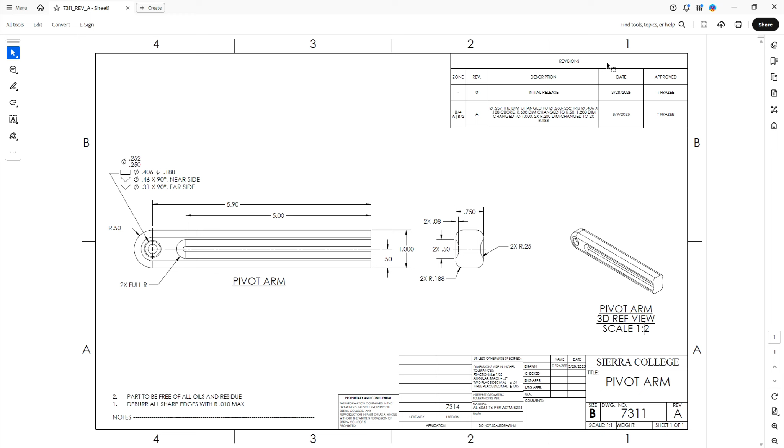The first thing you want to do in Fusion is save it off as the name. As per the assignment, you're going to put it in the format of the part number 7311, underscore, the word abbreviation REV in caps and A, because that's the version we're doing, underscore, and your first initial and last name. In my case, it would be T. Frazee. Make sure you're saving it somewhere you know where it's going.

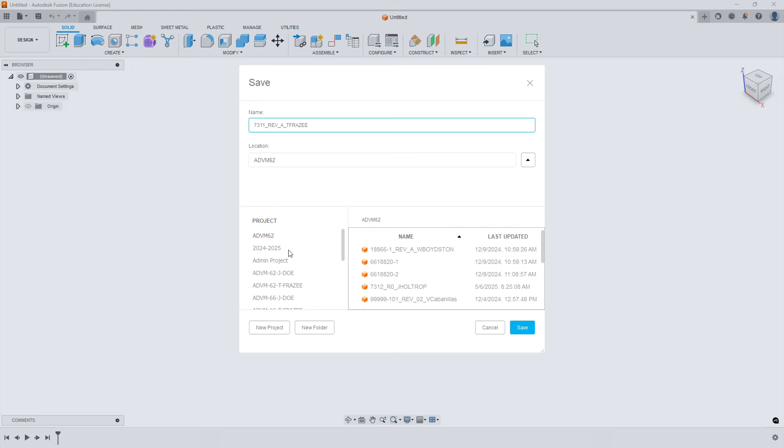We're going to start off by drawing the overall shape. We have an outside perimeter, basically a rectangle with a full radius on one end. Our origin for all our dimensions is this top right corner, so I'm going to model it just like that in Fusion, starting with a sketch from that view.

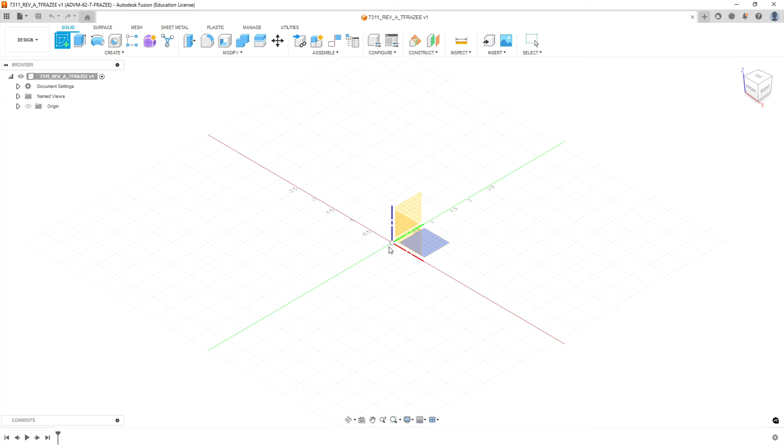We're going to go to Design and make a new sketch on the front plane. We're going to use the Line tool, starting to the left of Origin, going to Origin, then dragging down to make our rectangle.

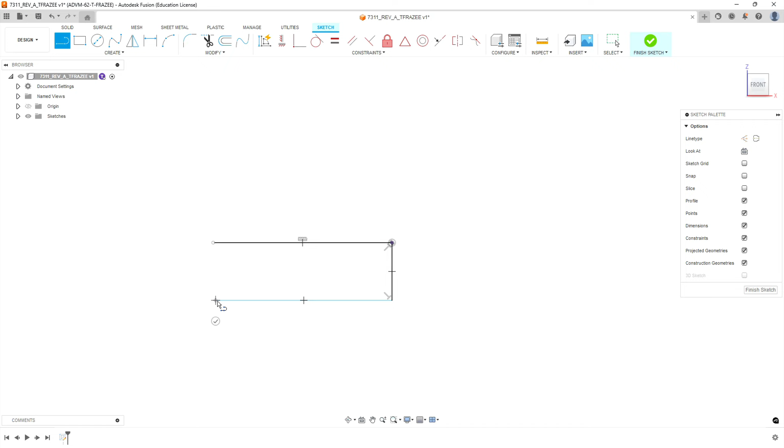We click, and then if we want to make an arc, we click and hold the button down and it'll turn into an arc, and we'll close that up. Now it assumed tangency for my lower one, but the top one it did not, depending on how careful you are in selecting it. We want both of these tangents, so if yours do not result in two tangent ends to this arc, make sure they have these symbols for tangency. Now we can put our dimensions on.

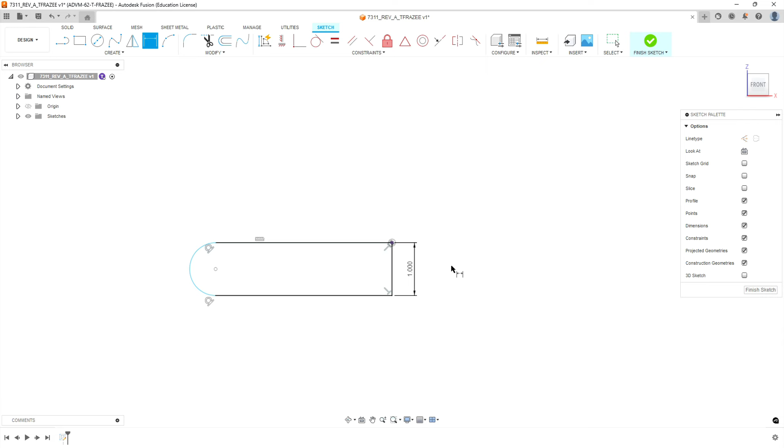If we go back to our drawing, it's 1 inch tall, so we're going to dimension that to 1 inch, and we're going to dimension the length from the end to where our arc ends, the arc center, which according to our drawing is 5.9. We should have a fully constrained sketch. If you expand your sketches, it should have the little padlock there, because the tangency points force this radius to be half whatever this dimension is.

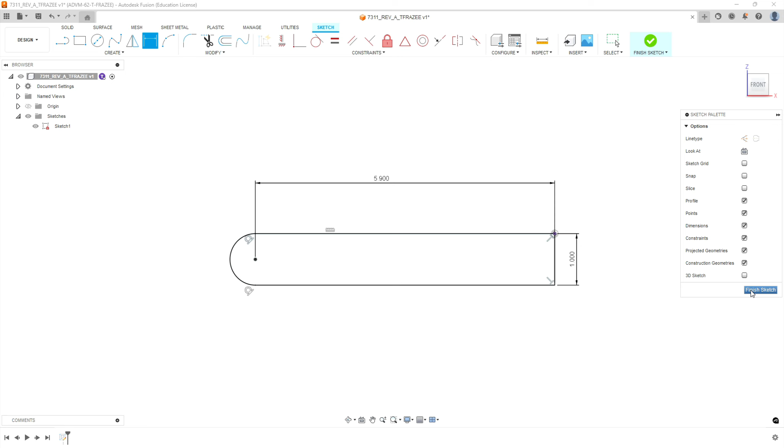Now we're going to select Finish Sketch and do an extrusion. Let's look at our extrusion depth, it is 3/4 of an inch, or 750 thousandths, so we're going to put in 0.75, and we have our basic shape.

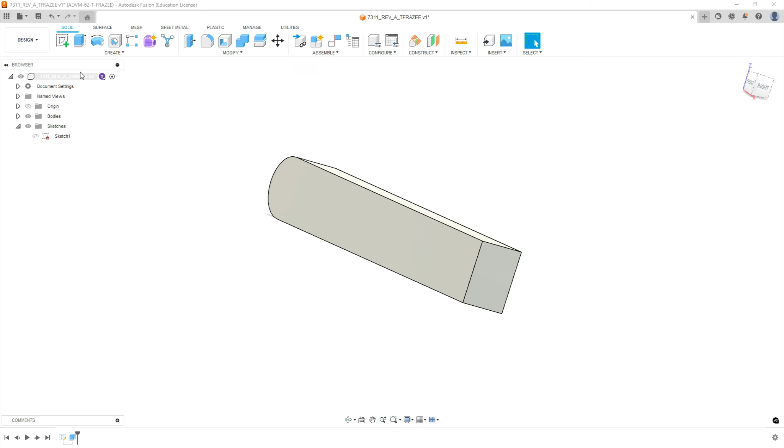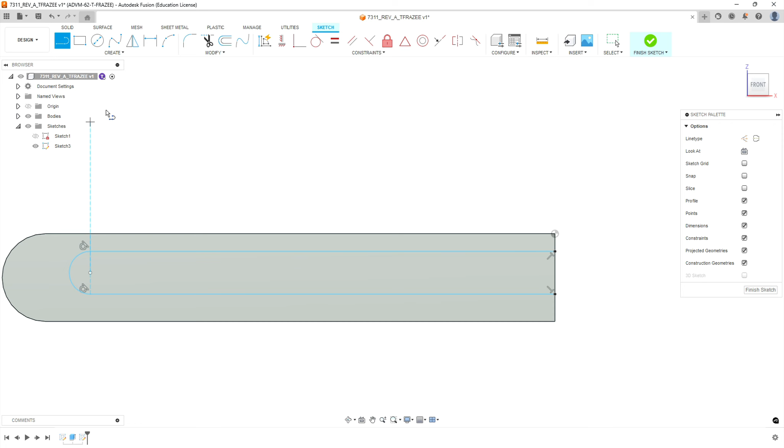We're going to make the pocket that's in the face of this. We go to sketch, sketching on the face of our block, and repeat something similar to what we just did to create the shape. We're going to start with a line on the right hand side edge, draw a straight line as horizontal as we can, then hover over the end of that line and hold the button down to make an arc, and continue with the line until we reach the other end of the part. So we now have the shape of this pocket here.

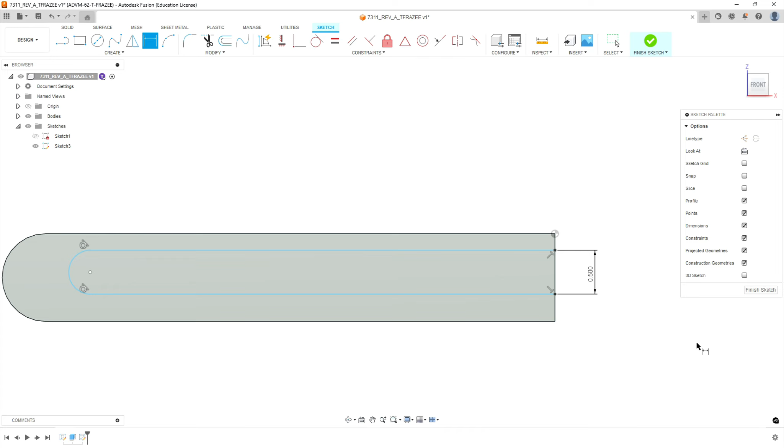It's 5 inches to center, and it's a half inch wide. We're going to put our half inch dimension in first, then come from one end to the center, that's 5, and we want to center this within our workpiece here.

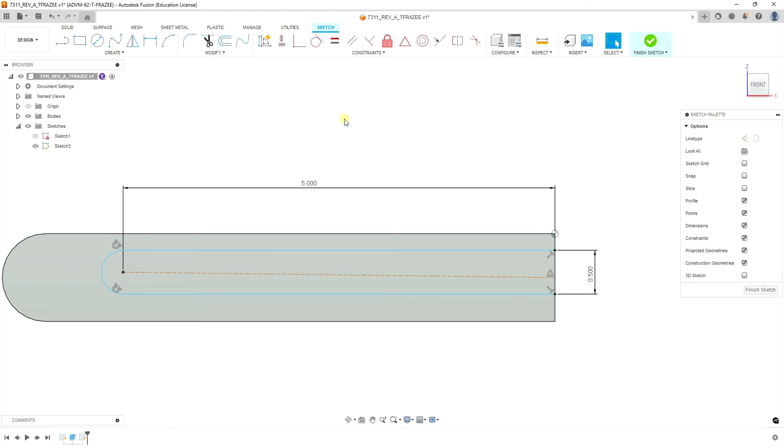There's a couple of methods we can use for that. What I'm going to do is create a line from center to the midpoint of the edge on the right. Then if we take this line we just created, we highlight it, right click, turn it into construction, and select the horizontal vertical command to force it to be horizontal, which should snap our shape into being centered on our material and horizontal. If we change the size overall of our part, it'll remain centered with that parametric relationship. We're going to hit finish sketch.

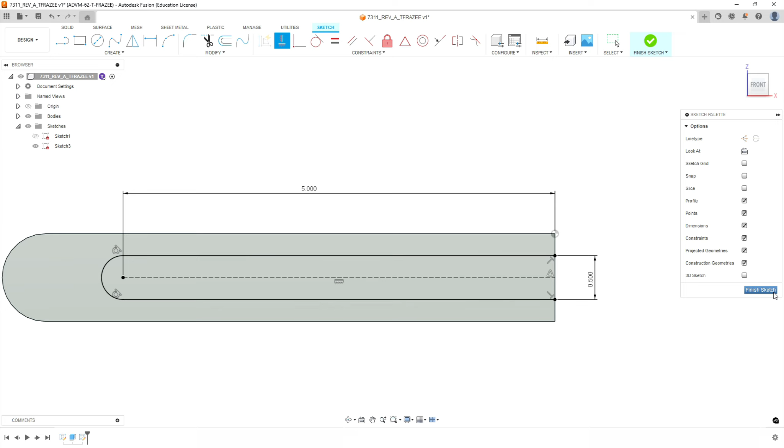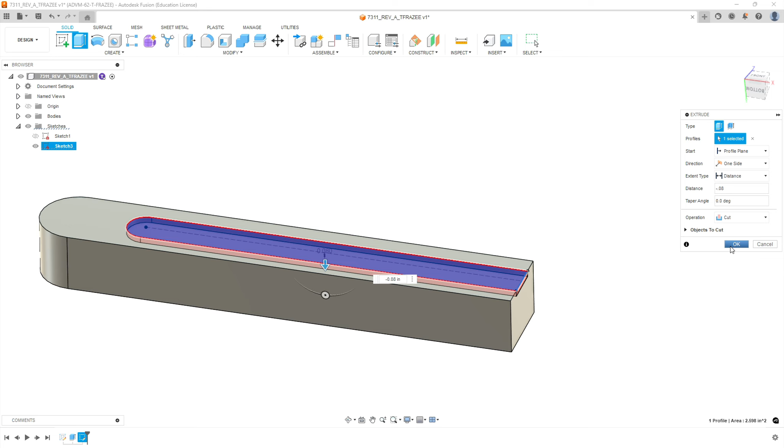Now you can use push pull or we can use the extrude command. I'm preferential to the extrude command. We're going to select the boundary inside that we're going to actually cut. Now it defaults to new body. What we're going to do is put in a negative distance of 0.08. We're going to switch it from join to cut. Sorry, it's going to be negative 0.08, which gives us our pocket. We're going to select OK.

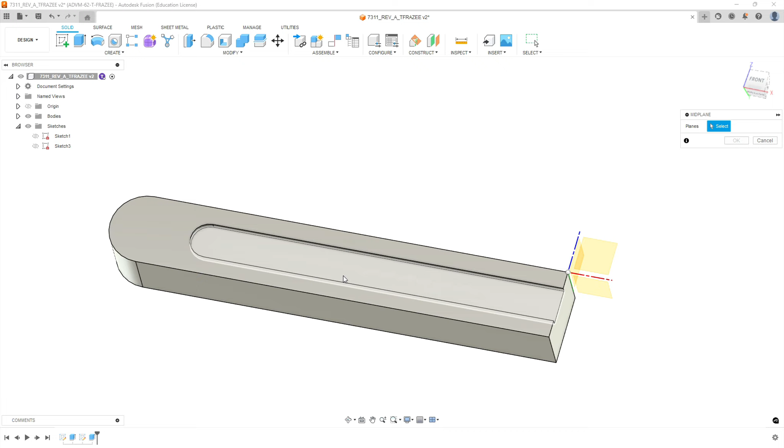So this feature and all the features that modified it also appear on the opposite side of the part. We could model that again, but another way to do this would be to mirror this feature. So we're going to construct a plane at the midplane between two faces, and we're going to select the outside faces of the part. That'll create a midplane that's halfway between the part, and it doesn't matter what size the part is. If we change it, it'll move with it parametrically.

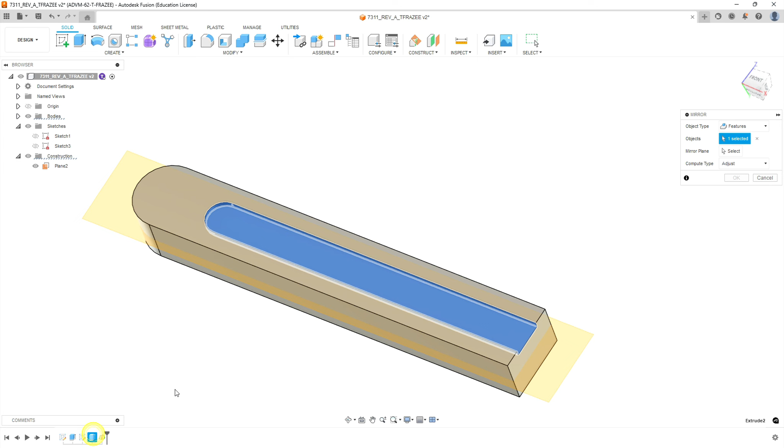Now we're going to go to create, and we're going to do a mirror of the feature. We're going to switch from bodies to features, and that allows us to pick the extruded cut we did on the first side, and our mirror plane is going to be the plane in the center that we just created. We're going to hit OK, and now we should have that trough cut in both sides.

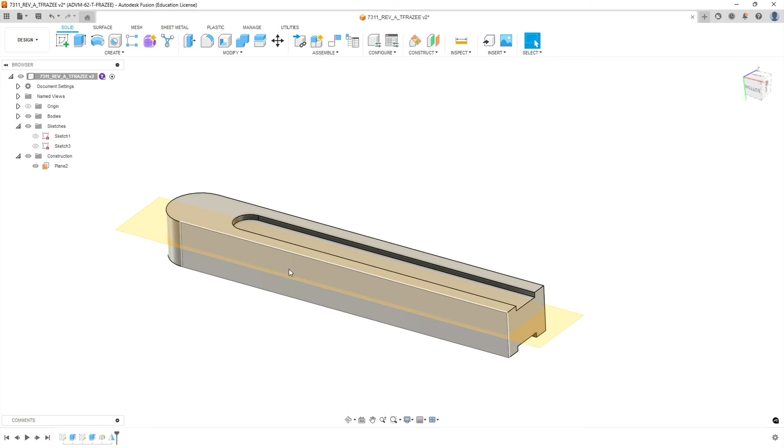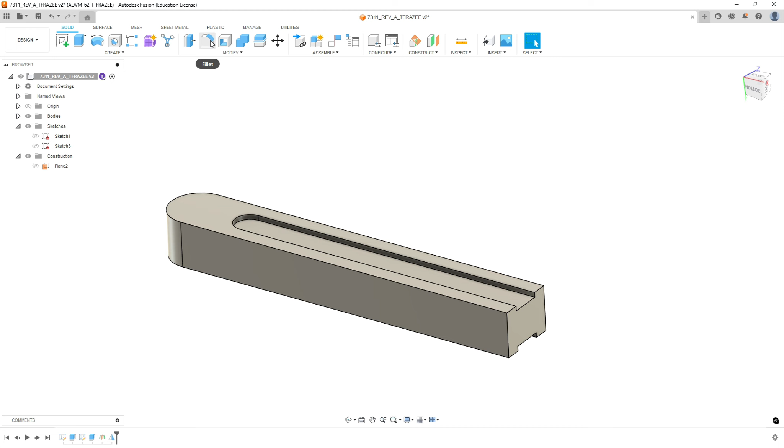Now we're going to go and make fillets. At the moment we don't need this plane visible, so we're going to make it invisible, and we're going to go through and do our fillets. So if we look at our drawing, we have two fillet sizes. On the inside we have a 2 times 0.25, and it wraps around the inside of this pocket. So we're going to do that one first. We're going to use the fillet command, and select the loop around the inside of the first

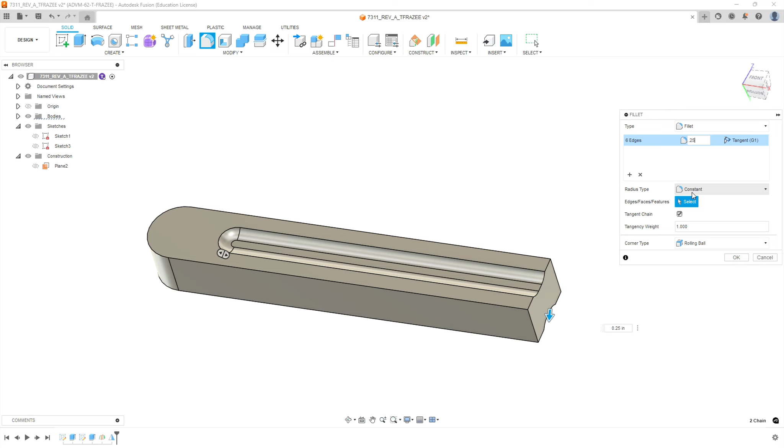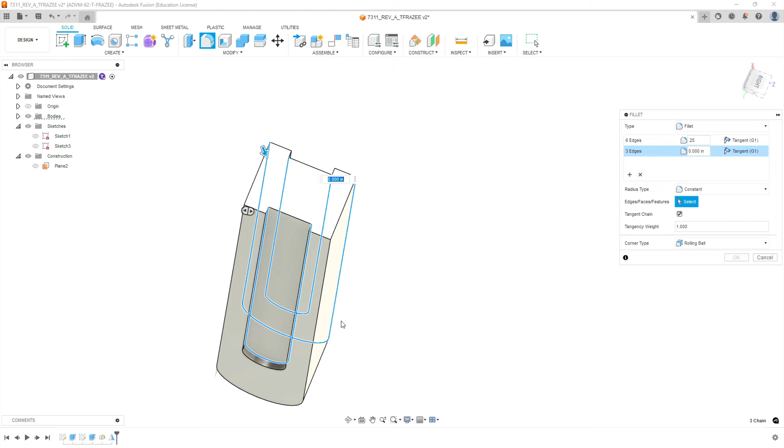pocket and the second pocket. Okay, and that's one fillet size, and we're going to put our fillet size as 0.25. Now we're going to create another selection set. We're going to select these two outer edges, which are a different fillet size. Make sure you're getting the edge and not the surface.

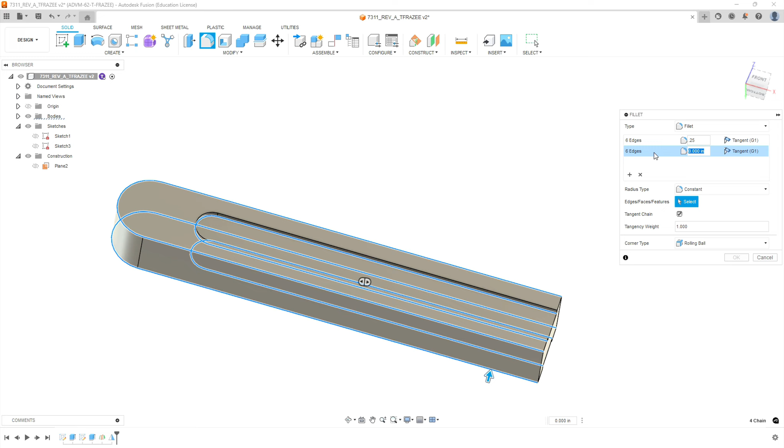According to our drawing, that fillet size is a radius of 188 thousandths. Now I happen to know that that is 3/16 rounded up, so the real number is 0.1875, and that's what we're going to put in, so that our tolerance is modeled so that we can use fractional radius gauges. So it's going to be 0.1875. We have our fillets now on the exterior of the part. We should be able to hit OK. And we now have a good portion of this part modeled.

So the overall shape, we should have pockets with fillets on both sides. Now what do we have left? We have this hole feature here, and this thing's a mouthful - it's a counterbore with a tight tolerance through hole, and it has a chamfer callout on both ends. We're going to make as much as we can with a counterbore tool, but we need to make sure we're observing these figures here.

Okay, so let's go. We're going to create a hole. It's a counterbore hole. The tap type's going to be simple. We don't care about drill point or not. It's going to go all the way through, so we're going to change this to through all.

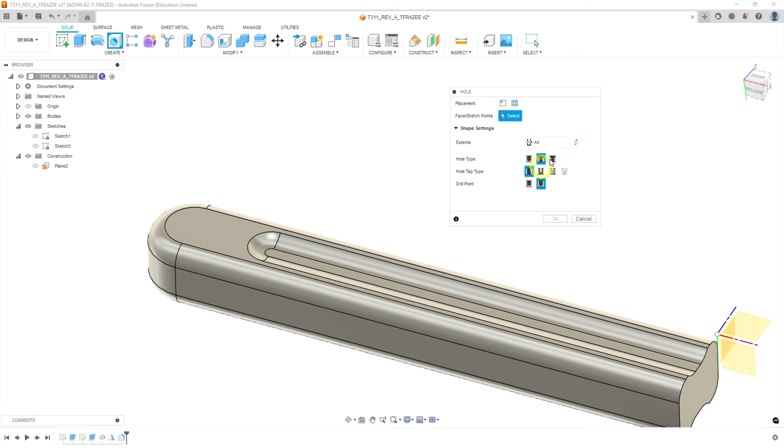And then we should be able to snap to have that concentric. Now it defaulted to this huge screw size that we're not doing.

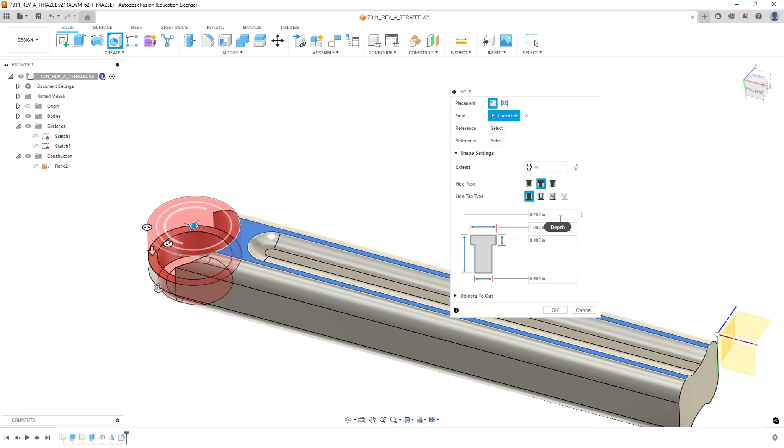So let's modify our numbers. Our hole diameter, according to our drawing, is a tight tolerance shoulder bolt size, so it's 252 to 250. We're going to draw that halfway in between that tolerance at 251. 0.251, okay, that's the through hole.

And then we're going to look at our next box, which is the depth of our counterbore. Let's go back and look at our drawing. The depth of our counterbore is 188. Now we could do an 875, because that's probably what it is, so we'll do that, 1875.

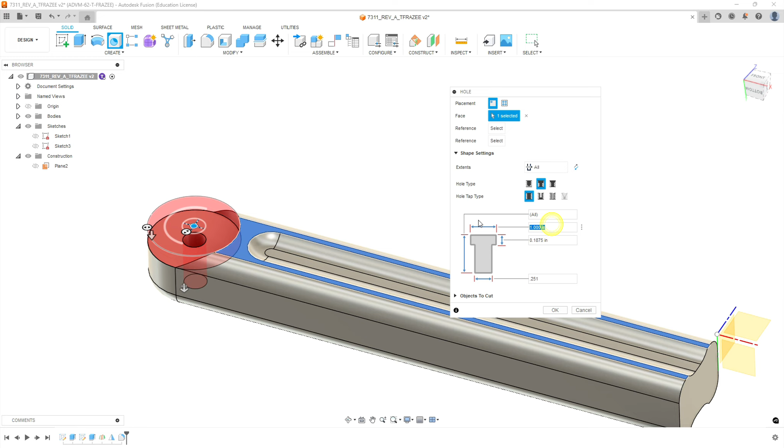Counterbore diameter is 0.406. So that gives us our major features here. We're going to select OK.

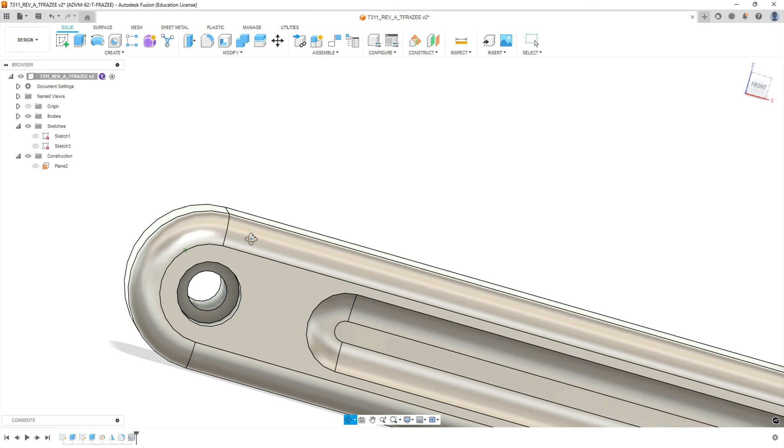And there's our counterbore. Now what we're missing is the edge breaks, chamfers that are on these holes here, or countersinks. There's a couple schools of thought. You could leave them unmodeled and machine them, but what I like you to do is get practice using the software, and machine the modeled-in fillets, because if you're working somewhere where you're receiving a model from someone else, you may have no choice.

So we're going to run through the calculation on here. Let's go look at the first one. So if our basic feature size on the near side is the countersink, we have a 406 hole with a 460 chamfer, or countersink, on it.

So if we take 0.46 and subtract 0.406, that gives us a 54 thou countersink. Half of that's going to come off one side and half the other. So if we divide that in half, that gives us a 27 thousandths chamfer size. Now we have a pretty good tolerance on this, so I'm going to go ahead and round this up to a 30 thousandths chamfer.

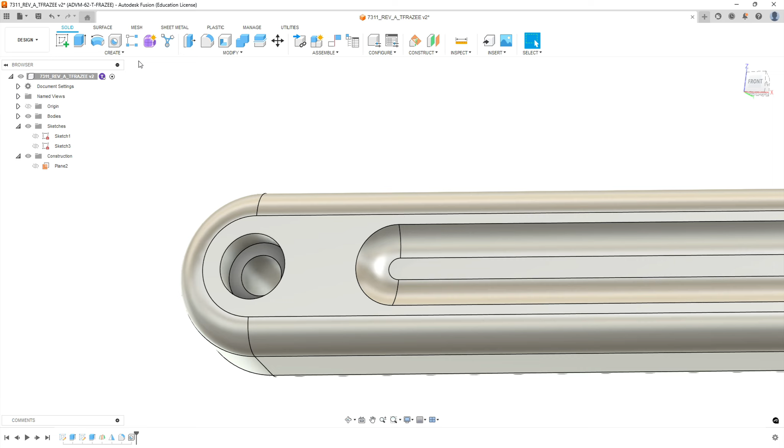Okay, so we'll go back to Fusion. We're going to go to the modify command, we're going to use the chamfer command, and we're going to pick on the top of our counterbore and make that a 30 thou chamfer.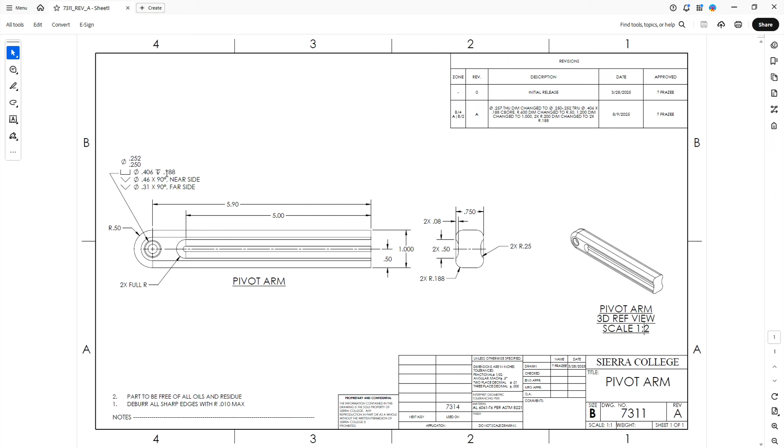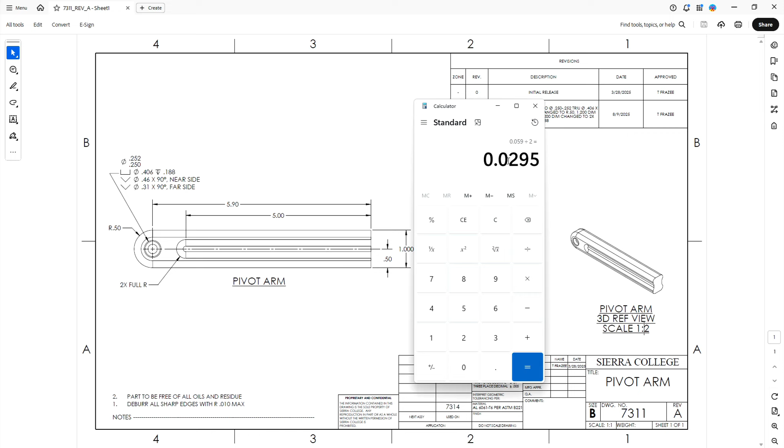Now let's go back to our drawing and calculate the next one. The next one is on the far side, so our basic hole size is 251, right? So if we take the countersink of 0.31 minus 0.251, we have 59 thousandths, okay, so it's really probably closer to 60. Divide that by 2, it's 29 thousandths. So the countersink size on the other side is going to be about the same.

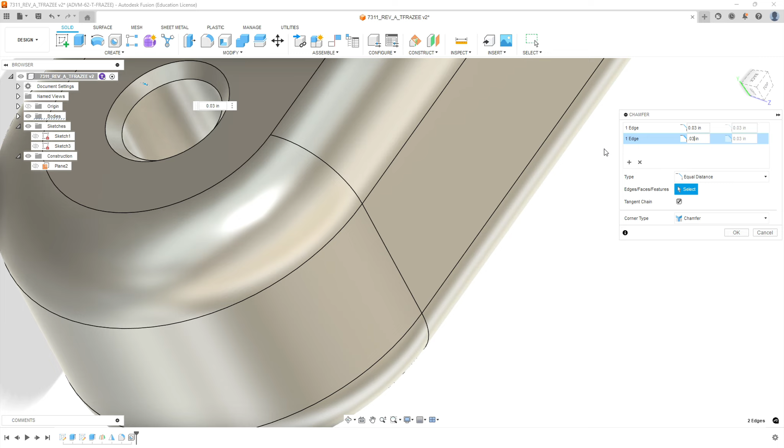So we can go back to Fusion and we just go ahead and select a new set, and pick the edge, and we'll set that at 30. Now you could have done this as one selection set, but because I had hit enter, it accepted that as a selection set.

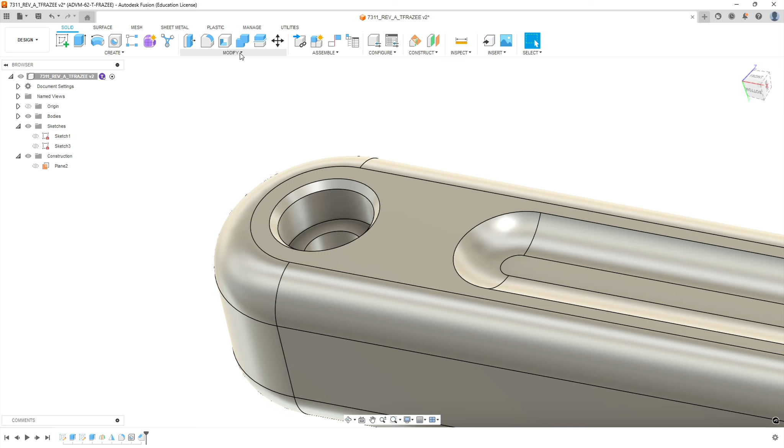Okay, now down here we probably should have a little chamfer too, and that's going to be covered by our deburr all sharp edges with an R10 max. So we can go ahead and go in there, and we're going to make a chamfer, and we're going to pick this last hole here, and we're going to put 0.01.

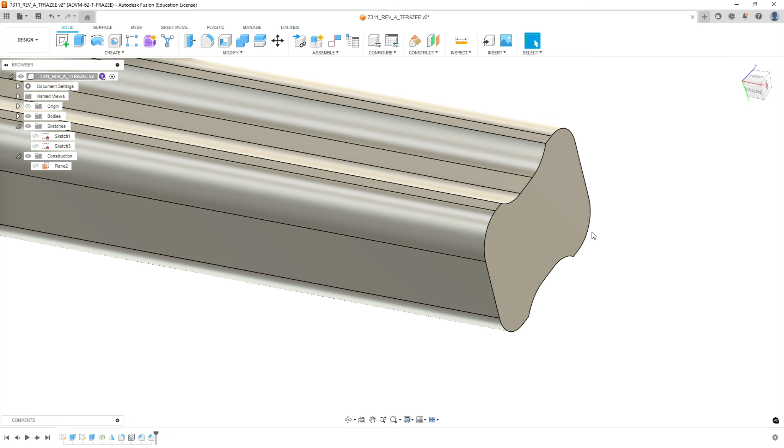Now the end of the part, we could put a 10 thou edge break on this. It's going to be difficult to machine that from any orientation but the end, and we're not going to stand this up on end just to do an edge break. So what I'm going to challenge you with is this is going to be some of your handwork to see if you can use a file, maybe some sandpaper, and put a 10 thou edge break along that edge by hand. And it needs to look clean.